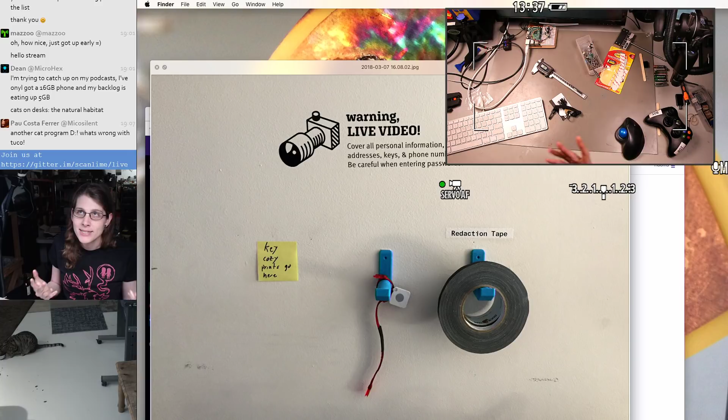And then in the past I've used stuff like OpenSCAD. I've actually done a bunch of stuff with OpenSCAD because it was the very first program I used to do CAD, not just CAD in general, but specifically for 3D printing. I had done a little bit of 3D modeling for animation before doing any 3D printing, but the very first thing I reached for when I got my first MakerBot way back, that MakerBot is actually the one that's still up on the shelf there.

Can I show you with the cat cam?

It needs a little bit of work, but it's still in mostly all right condition. I should do like a fixer-upper stream at some point. That sunflower Mac was never actually mine - a friend of mine found this on the sidewalk, and I took it in because it seemed like it was in good shape. And that monitor is destined to go elsewhere, it's just there temporarily. But yeah, that's my heavily modified MakerBot.

The first thing I used when I started on that machine was OpenSCAD, and I've done a bunch of stuff with that. But I think my standards at this point for stuff that I want to print and use around the shop on a daily basis - like I want things like fillets to be easy. I want to be able to do a good mix of visual design and more analytical design.

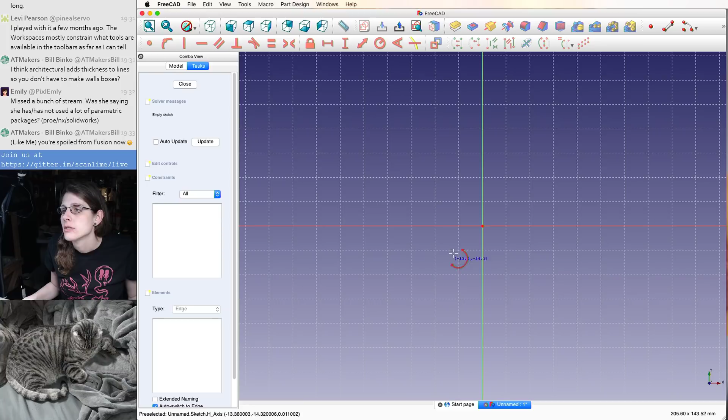Okay, so what am I doing here? Can I has circle? I can make lines, I can make arcs, center and endpoints. Is there a way to make a circle directly, or do I need to make an arc with the two ends constrained to each other?

It doesn't seem like I can do that, actually. There seems to be some ambiguity between a full-size arc and a zero-size arc right there. Let's look for something else. Oh geez, I can't delete this by pressing delete. Huh. I can drag it — how do I delete you? I don't want you anymore, bye.

What possible reason could there be for delete not deleting the thing? Oh, was I in some kind of mode? I pressed escape and something changed. Was I not done creating the arc yet? Was that the issue? Okay, now I can delete it. Oh, I think I just deleted the whole sketch.

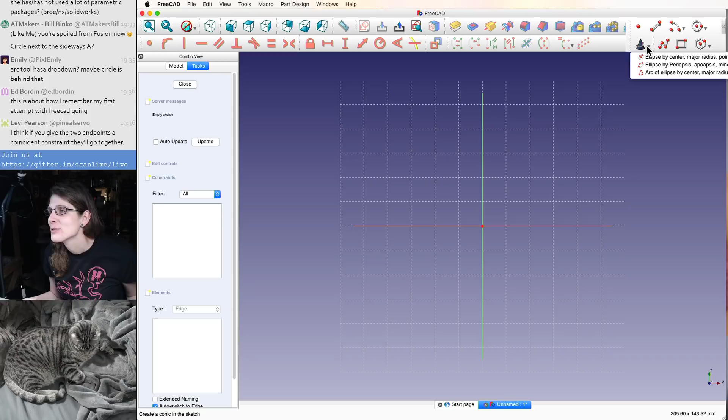Okay, deleted the arc. Do we have a circle primitive? How many expanders do I have to click? There's a wizard hat. Oh, is that? Oh, there it is. I just didn't see that before, or maybe it was slightly off screen. Center and rim point — I kind of wanted center and diameter, but that'll do.

So I'm still in the circle tool. Was there a... oh, its circle tool disappeared now. Is there a shortcut for this? How would I know if there was a shortcut for this?

I'm gonna assume there's no shortcut for anything. There's probably a shortcut buried in the wiki page, or like in some commented-out line in the source code or something.

This is zoom-related stuff. Where's different selection tools and all that?

So that's still... do I just have to press escape? Last time, no, that exits the sketch. And then going back into the sketch takes me into the start center for some reason. I have no idea which behavior is intentional and which isn't.

That's one of those things where if open source software had design documents or anything indicating intentionality with regard to user-facing design, you'd be able to answer that question — is it supposed to do this? Maybe, I don't know. You get that same problem in software that does have design documents. It's just that you can easily look at the document and route something toward it being a problem with the design or the implementation.

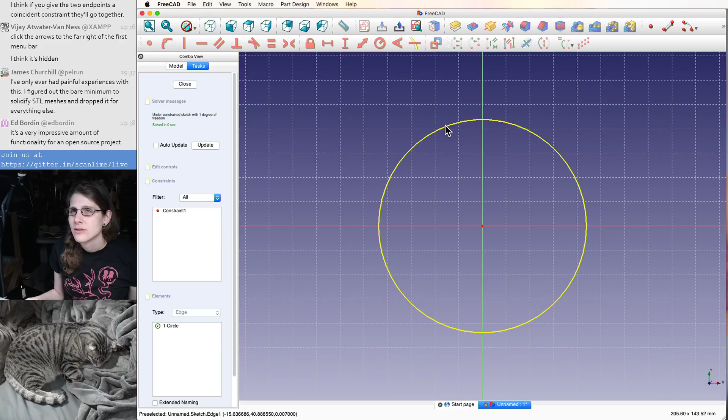I think I just have to set the radius. Okay. So that's what? I think I want like 4.25. That's my magnet.

Now, how much? I think I want to start by modeling basically a cylinder that's kind of the interior of this booth for the keychain. So,

Excuse me. Just getting a rough idea of how big I want this to be. Maybe 6 centimeters or so. The widest thing on here is this access card, and it's like standard card size, which is about 5 centimeters.

Let's see what 6 centimeters looks like. Let's go all the way over here and get a circle. Oh, there we go. I can encourage it to show up on the screen.

That wasn't actually constrained, was it? How can I tell if I'm making this constrained? So way down here it tells me H axis, V axis, root point. I think that's what I wanted.

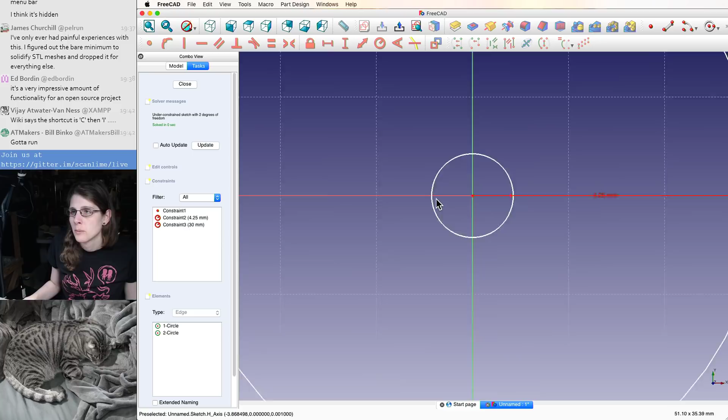Can I move this visually at all? Maybe not. Oh yes, I can. I just have to click it just right.

Oh, I'll be right back. Oh, so much sneezing.

Alright, how thick? Just like, what do I want this to be shaped like? 'Cause, I mean, I don't want it to be a fully enclosed circle. Can I offset?

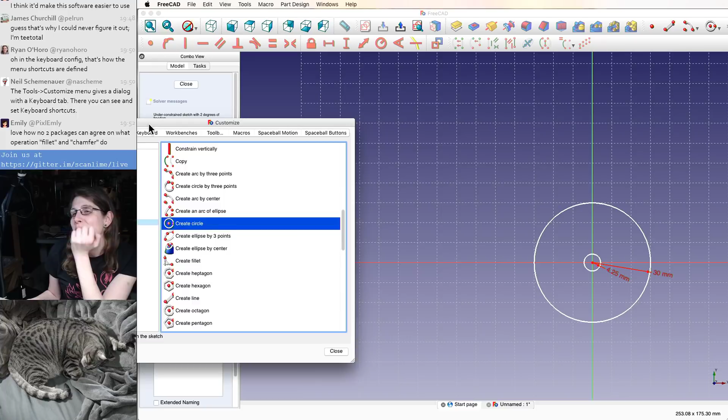Great, so if I want to create a circle, all I have to do is root around in this dialog box for ages. Now, what is this even for? Can I drag this to the menu or something? No, I can't drag it.

What is this UI for? There's a help button which just gives me a weird cursor. Oh gosh. This is like a UI blooper reel here. Oh gosh.

I can't drag it, it just scrolls the whole thing. I don't see what this is even for. I'm not even switching commands here, like that's just what was already highlighted. Is that the problem? Do I have to exit this first?

Why doesn't that have an icon now? See, I can't drag them, can't right click, can't do apparently anything with these objects. What are they even for?

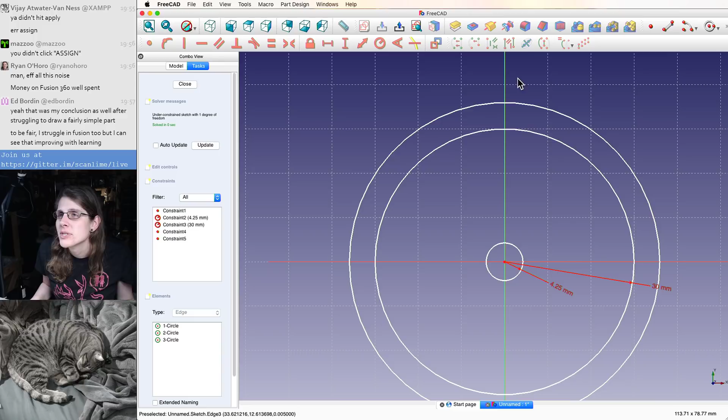So C was coincident? Alright, might as well use that keyboard for something. Where's that radius, though? Oh, there it was, Shift R. Alright, where's the wall?

So I want a flat surface I can put against the wall. And then I want to kind of blend that into this with some more circles. Let's just throw lines all over the place.

Making stuff tangent. Do I want that to be thicker on the back? I don't know, man. 2mm is probably thick enough for everyone, right? I'll add some internal fillets.

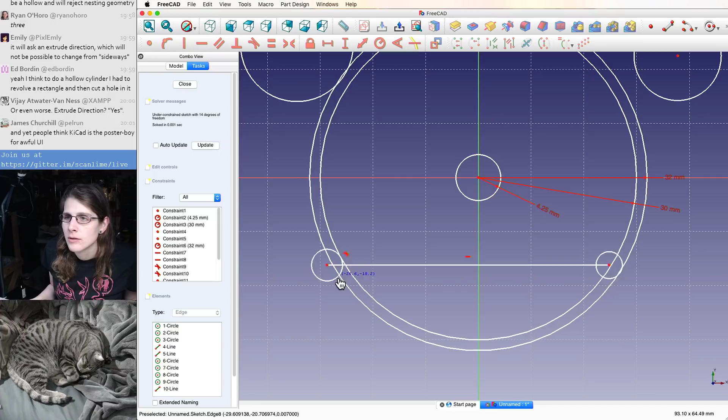Can I make 2 circles tangent without it exploding? I don't know. What? Okay, that's just the circle not being vectorized very accurately.

I should really save this. This could crash any second. Sure, let's...

Alright, so I can decide how far down that should be later, maybe based on how wide I want that opening to be or something. I'm gonna just go to town with a trimming tool and hope that doesn't break anything. It probably will.

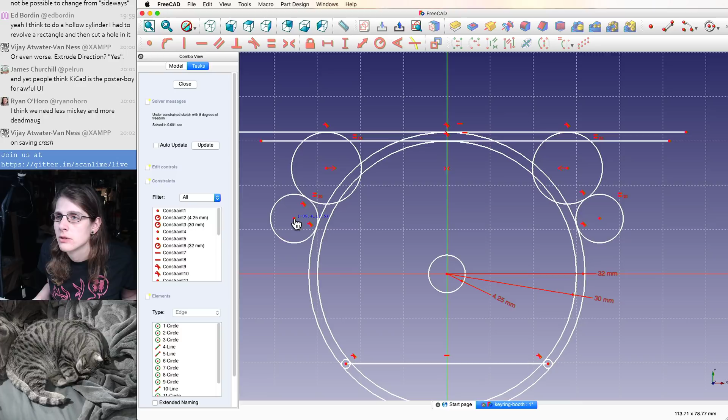Maybe I want to set some of these sizes first. This is entirely aesthetic, I'm just trying to figure out what I want the back of this to look like.

I mean, I could also try to make it have a sharp joint up against the wall, like that. Oh, that's kind of nice.

That is pretty close to being on this line. Maybe I'll just actually make that on the line, like that. Cool.

How would I make this distance fixed? Yeah. 40 millimeters? Nerp.

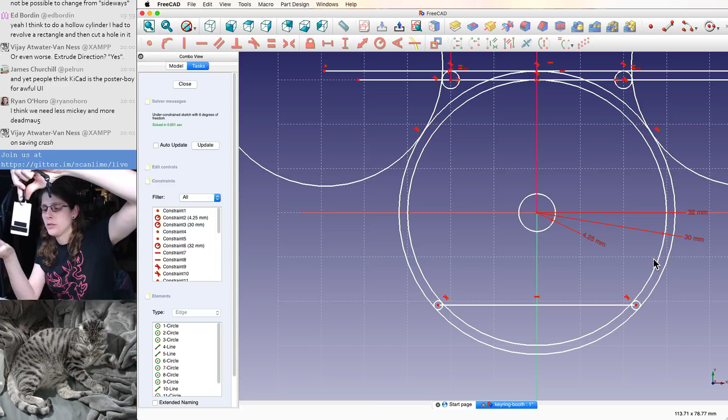Should figure out how much I actually need to cover up. Let's assume the sensitive information is... Oh, let's just make it 45 degrees. Did that work? No.

Oh yeah, this is much more deadmau5 than Mickey now, isn't it? That's great.

Manaware is asking if this is a thing you hang your key rings off of. Yeah, basically. We're looking at it top down right now. So this edge right here will be up against the wall, and this is where a magnet goes in. And then this is kind of like a privacy shroud that will keep cameras coming at it from a side angle from seeing what's going on inside. Most people don't have cameras peering over where people might be hanging up their keys, but my shop has that going on right now.

Well, that seems all right. I'm a little worried this isn't big enough, or maybe I just need to put this further back in there.

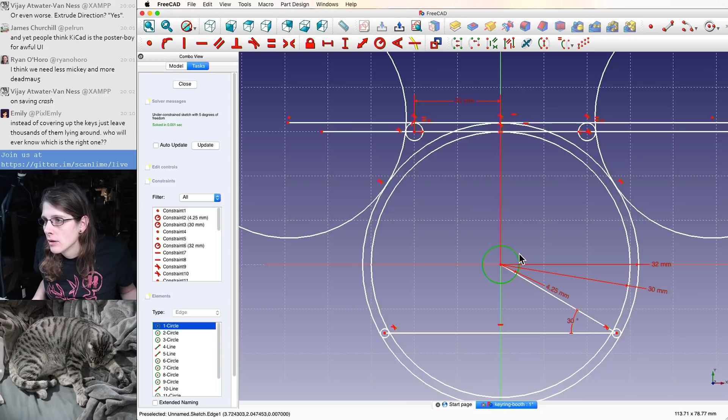I can't just move this, can I? I'll just delete this. I wanted to try putting it up here somewhere, maybe.

Degrees of freedom. If I click this, some of the icons change.

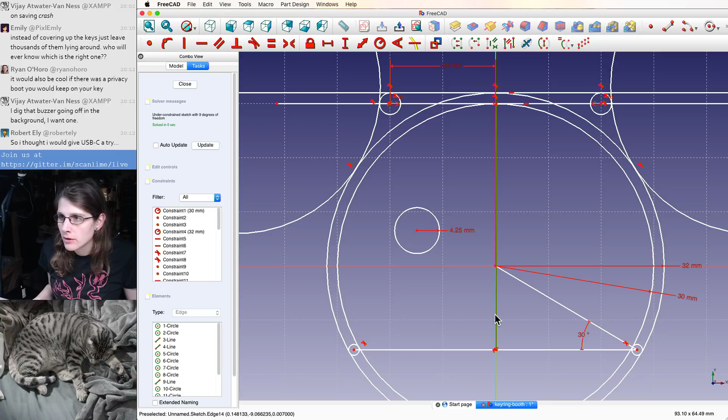So, like, how about instead of that line, actually? Let's delete that line. Instead, oh geez, this is gonna be all over the place. So I can make two lines. What is even going on up here?

What? It'd be cool if I actually got more resolution when I zoomed in. Like, are these touching or not? How do I know? I mean, I can put the constraints on that I want.

Does the space mouse work? Space mouse does not work in the 2D scenes, at least. I don't get anything from the space mouse.

Robert, which thing are you asking how to hand solder? The passive component or the connector?

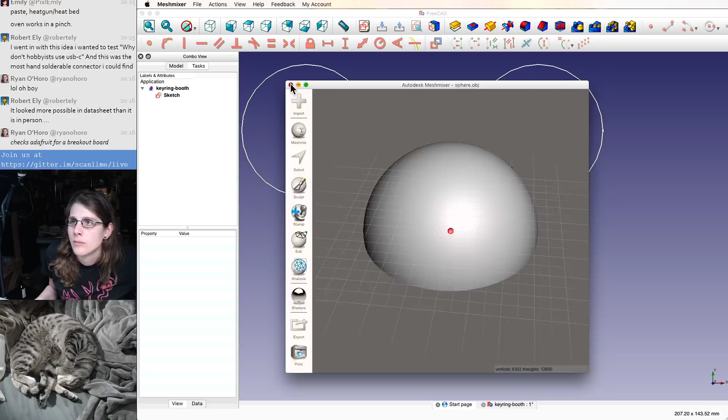I thought this was a pretty safe app to just try out Space Mouse support in. That would be useful if it works. Do we not have a browser either?

Let's just update this. Oh, the USB-C connector, yeah.

Yeah, I've not tried doing one of those myself, actually. I'm curious what people's experiences would be. I would expect you'd have to go in there with some gentle heat and patience, with a hot air tool and possibly also a preheating tool.

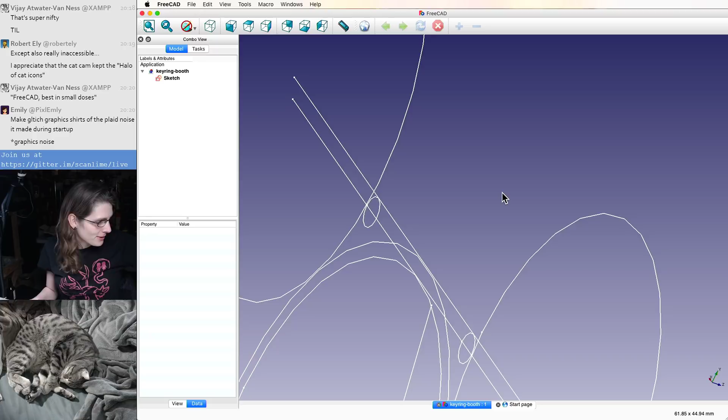Yeah! Whoa, where is my center of gravity? Okay, this is slightly different than I'm used to. The coordinates are rotated 90 degrees relative to how I'm used to the Space Mouse operating. That's not terrible.

And it does work in sketch mode, but it doesn't keep it orthogonal. The buttons don't work on my Space Mouse. That's fine, well, some of them do. The keyboard mapped buttons work, but there's a button that's supposed to zoom and a button that's supposed to rotate, and those don't seem to do anything.

Okay, I was just trying to put the magnet on, right? So I want these to be equal. Where are my constraints? Where did the constraint toolbar go?

Why am I having a new problem? That whole toolbar with all the stuff that I was using is now gone. Oh, I was still in the Start workbench somehow, instead of Sketcher, which is what I want.

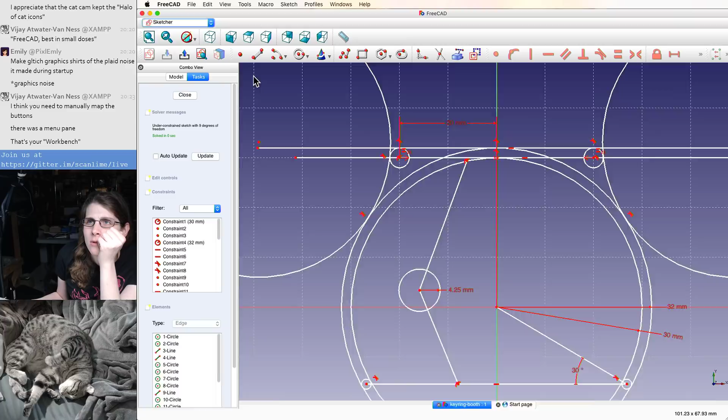See, like in Fusion 360, it has a modal interface like this, but they make the mode very obvious, and it's weird where in this view the mode isn't visible. I can turn on this, which gives you the mode, but now the mode takes up an entire line. Can I dock this maybe? Yeah, that's better, that's more like what I wanted. Why isn't that the default?

Why are these laid out different? Oh gosh. Oh, I hate these toolbars, these are so 90s. Somebody thought this was a good idea because you can just rearrange it and make it do anything you want, but it's the same reason I hate the toolbars in IDA 5.7, because I'm just always having to mess with them, and it messes with your muscle memory anytime stuff moves. If it was always possible to get them to stay in just the right spot, that would be great, but if there's ever a bug in the toolbar, it just messes with my ability to remember where things are.

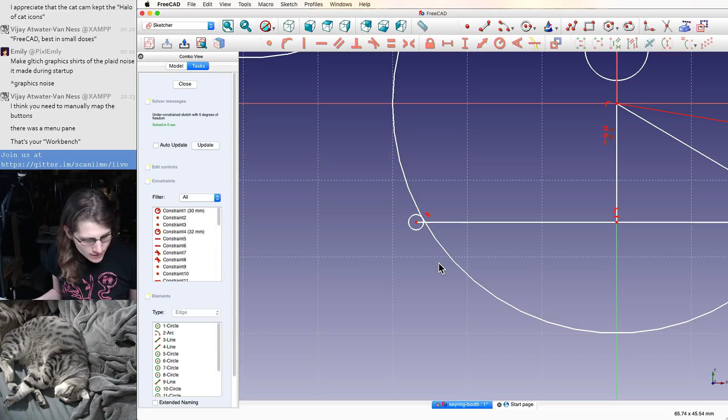Really? Really? Where does this work? Do I need to make those stick together more thoroughly somehow? I thought these were already constrained to be attached to each other.

Where are my remaining degrees of freedom here? It says I have 5 degrees of freedom. Maybe I have to make all of this stuff construction geometry and somehow select the pieces I want, but I need to split this, and I need to say right here at this intersection, I want this and that to be different parts of the curve. And I thought that it would automatically do that at the tangent points.

Come on, web browser. Where is my web browser?

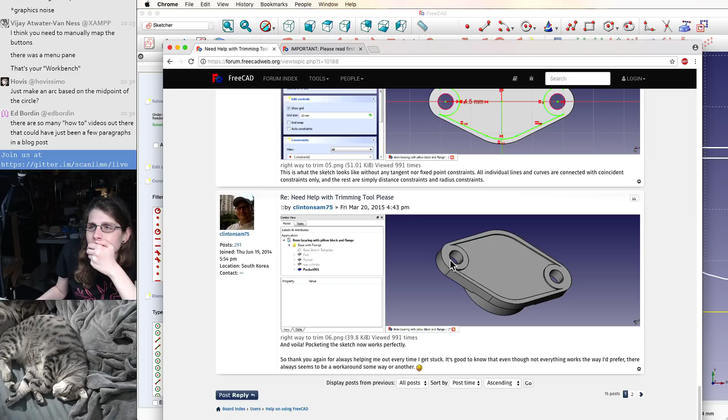Has this gotten any better since 2015, is my current question. So it seems like either we created the constraints in the wrong order, or the constraints aren't actually constraining it. Let's try to figure out why. We still have degrees of freedom in the document anyway.

What is free to move? This is free to move. I just want to make this pretty big. 50, sure. 4 degrees of freedom now.

Where are my degrees of freedom? It'd be cool if you could tell me. Is there any color coding? Am I just gonna have to drag stuff? Oh, these lines, they can slide.

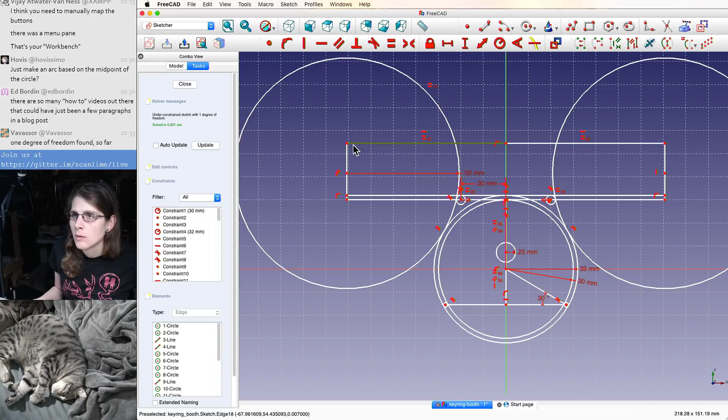That. Fully constrained. Turns green to let me know that I've earned a cookie.

I don't know why trim wouldn't work at this point. Let's see if we can make trim do something different. Oh, interesting.

Still no. Oh, it highlighted the whole thing, but when I actually clicked it, it did the right thing. Let's see if we can keep that up. No.

I really don't like this. That didn't even trim at the right place. Look at that, look at that. It's supposed to be tangent right there. I could drive an entire truck through that gap.

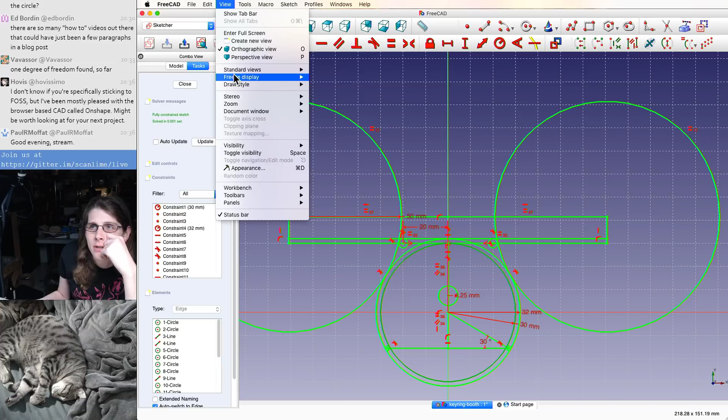Visibility. How frustrated do I have to get before switching tools? I wanted to try to do something entirely with FreeCAD. But it just seems less like I'm having specific problems and more just that there isn't that much here, or that I'm having trouble finding what is there. I mean, it's cool having all these different spaces, but the sketcher at least seems like it's kind of sparse.

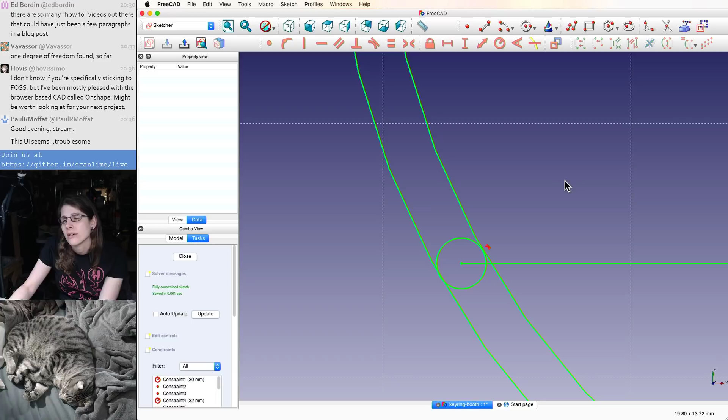And Onshape, I don't know, I should try it just to see what people like about it. I just haven't heard a lot of specific things that people like about it, and it mostly just seems to be because it's a browser-based thing. And I don't really like browser-based things that much. They're okay, but I wouldn't use it because it's a browser-based thing, and it seems like that's a slight negative to me.

What if I take off all the constraints and redo them? Save this. Let's leave the size constraints. I'm going to take off pretty much everything else. Maybe I should keep the horizontal and vertical constraints. I don't know.

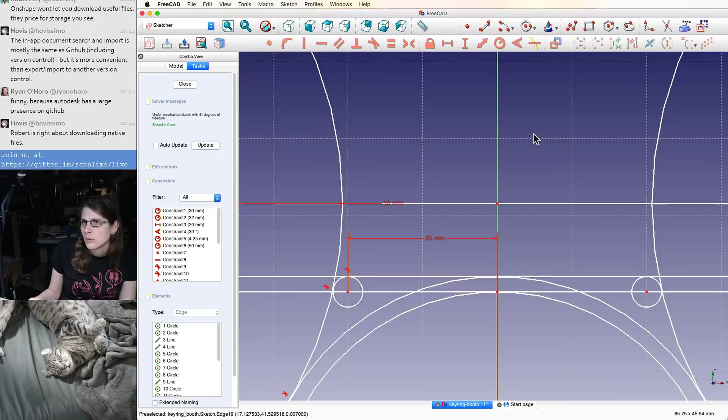What can I even move? What do I actually do to figure out what needs constraints? I saw tools to select over-constrained areas, but not under-constrained areas.

Oh, Took's looking great on the couch there. He's having a good time.

Oh, where was the trim tool again? T-R. Was that a crash? I think that was a crash.

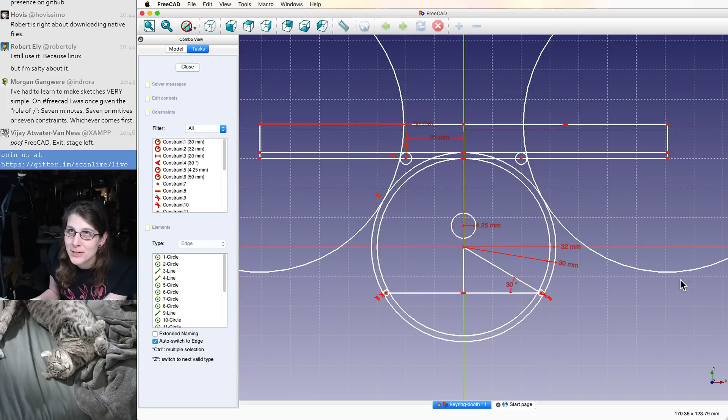Is that reproducible? This is what you say after shooting yourself in the foot, right? You just pull the trigger again. No, it isn't - now it trimmed way up there. Am I just gonna have to make my own tangent points? Or make my own trim points?

Can I attach something else to the intersection and use that for my trim point?

I don't like this program. I'm sorry.

We could go back to OpenSCAD. There's a whole OpenSCAD workspace in here. What is that like?

It can shell out to OpenSCAD and put a copy of the results in here. Cool. Cool story.

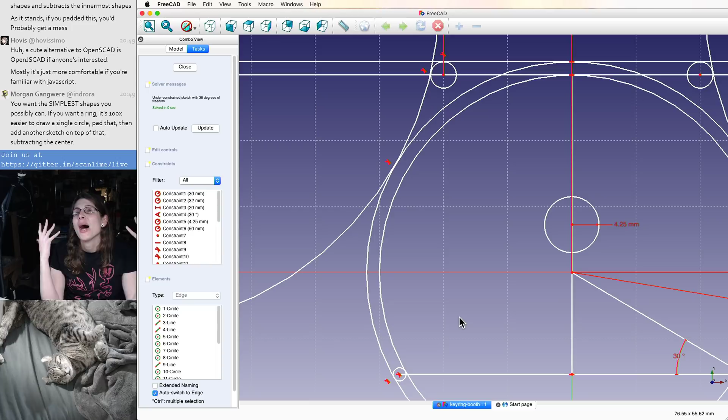If I can't extrude any of these shapes successfully, I don't... this is about the point where I would love to actually ask a FreeCAD developer, how do you get from here to a working model?

This is really close to what I want. Can I use all these pieces as guides and then just do the unions and everything else I want in 3D instead of 2D? That doesn't seem more likely to succeed, does it?

Okay, so I'm outside the sketch right now. What can I do with this? And how can I see anything?

What workspace am I in? I'm still in the start workspace, which I had to open up to see. Drawing, part design.

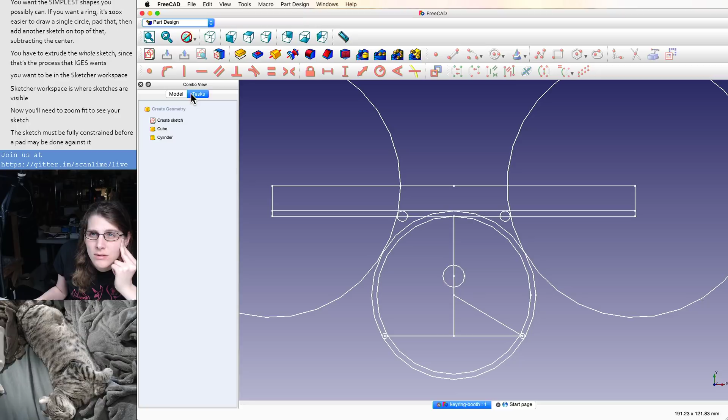Okay, so pad - this is, I think, what Morgan was talking about with making the extrude, and it's probably going to break if I do it to the whole sketch. So can I make new sketches that correspond to the pieces I want to keep out of this design?

I think so. Can I copy a piece from that? Can I reference? I think all I've got are the axes right here. Can I project a piece from a different sketch on here? Can I just make a bunch of copies of the sketch and delete the parts that I don't want?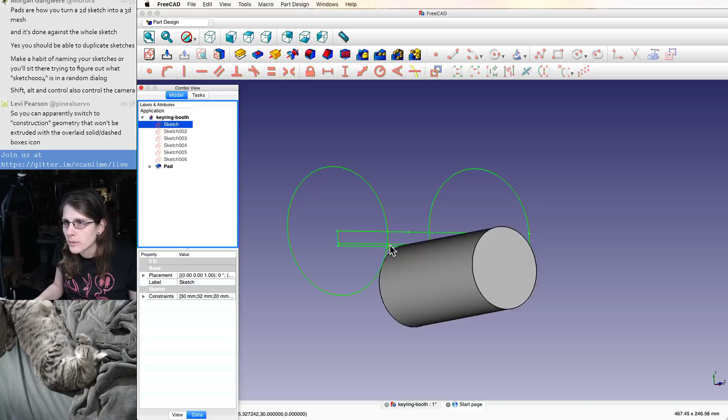How tall do I want this to be? There's no way that doing the rest of this is actually going to work, right? Like, I need to...

Morgan's asking if my sketches are constrained to the 2D origin. Maybe. Why does it matter?

Like, the problem I was having was just that it didn't seem like trimming actually worked. It just didn't seem like it knew that objects that are tangent actually touch. At this point, I just feel like this is an exercise in futility.

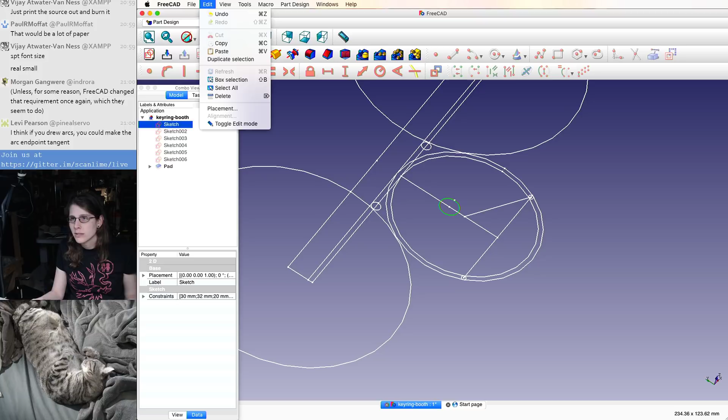What can this program do? Are there examples of objects that people have made with FreeCAD, and how do they even work? Do they use the trim tool? FreeCAD success stories.

What is all this stuff? I can't believe I clicked on a LinkedIn page.

So you built this with FreeCAD? That's cool. Where are pictures of the CAD part of it? I don't know.

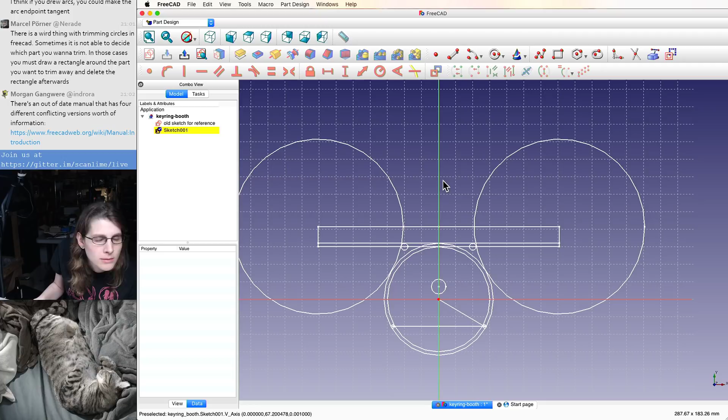Oh, see, that time it was just like a 3/4 second delay between pressing the middle mouse button and actually going into pan mode.

Okay. Arcs. So I'm actually selecting the origin, right? Root point, yeah.

It took like a second to switch into panning mode that time. What the heck?

Alright, and I'm just gonna put this vaguely over here without a real constraint yet. And then this goes all the way around. I'm just gonna have to do this without trimming or anything.

So can I make these tangent?

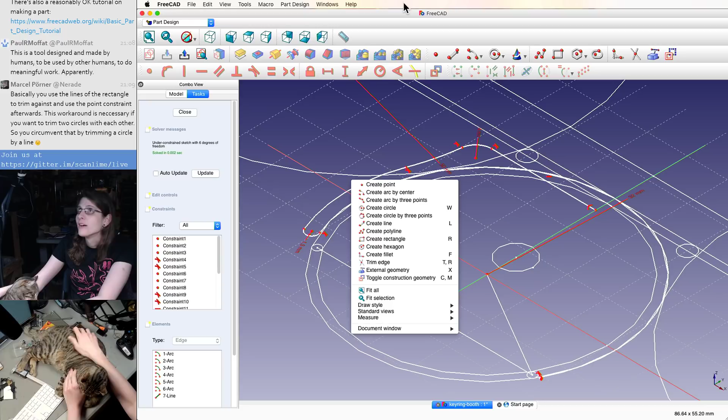Wake up, controller. Tuco, you're helping out. Oh, he is so purring now. Tuco is good at getting my attention. Yeah, good boy.

Can I have this back? You gonna lay on that raspberry again, honey? Don't eat it. Oh. Hey, honey.

Oh, can we set this distance?

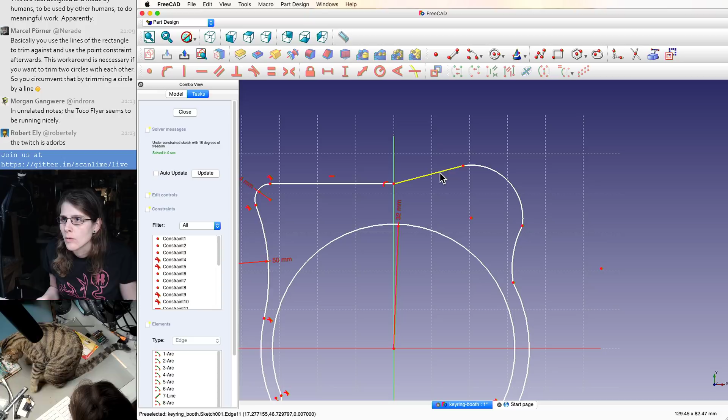It's getting there. Just needs to be a little less asymmetric. Maybe even completely symmetric if we're feeling brazen.

That's what I wanted. So now I can adjust that width and this height. Yay.

Can make it have such a wide presence on the wall. How wide is my adhesive strip? Adhesive strips are 20 millimeters-ish. Actually, like 18 millimeters, so they're probably sized to fit on something that's about 20.

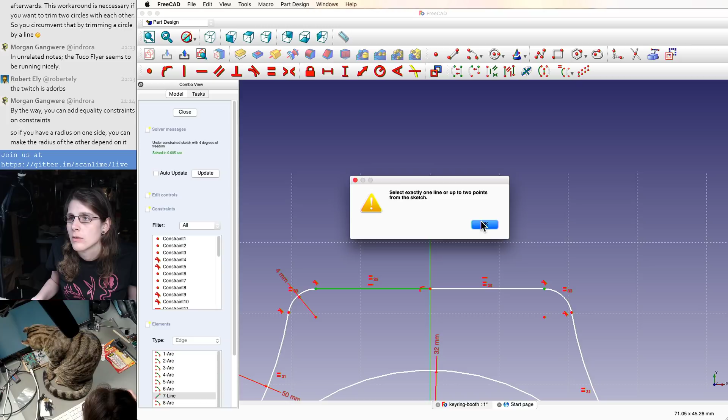That's pretty little. Not terrible though. That just, I don't like the aesthetics of that.

Whoa, 45. Oh, let's fix that.

Yeah, that's better. That's like enough where I could use 2 strips if I wanted to, but I don't have to.

And then I'm still looking for a way to set this distance. I still don't have like a midpoint. I can make a line that is tangent and horizontal.

Oh, can't I just, like, I know this is already centered. Can't I just use a vertical constraint? That should be enough, right? I don't want it to try to extrude geometry based on this line, though.

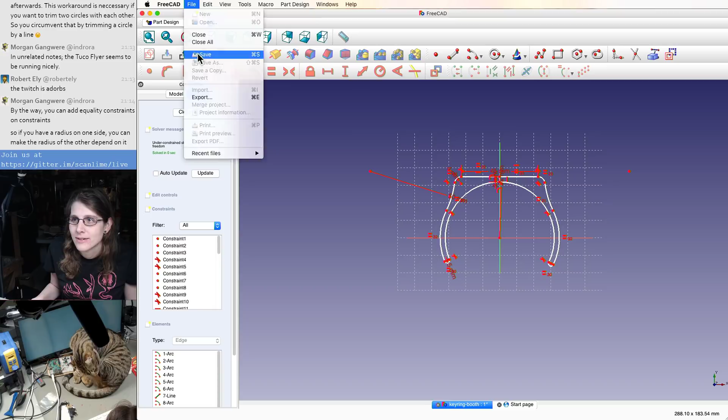If I delete the line, it deletes the constraint. Let's try keeping that there. I don't know, man, this doesn't seem likely to work, does it? Is this the simplest sketch I can get away with?

Whoa, what am I doing? First and second length? I'm not used to how this is 90 degrees off from all the other Space Mouse apps.

Let's try deleting this. That worked, I guess. And how tall did I want that to be?

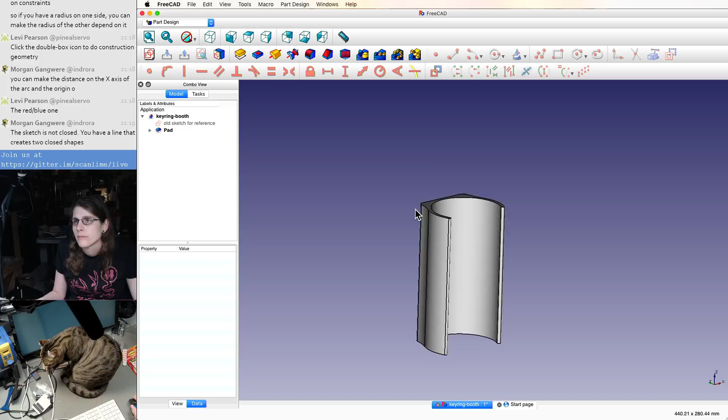Ah, that was exhausting. And that looks okay, but what if I wanted to fillet these edges, for example?

I don't know, let's try to keep this really simple. This is almost viable, I just need to add the top to it. Let's just try to keep this simple.

There's the old sketch. Oh, neat. F2 is still rename.

Oh, this is one of those Apple keyboards that tries to have brightness keys. No thanks. Oh, they were already set like that. Why wasn't it working then? I was pressing F2. Alright.

Let's call that the shroud.

So I think I just need to make another sketch based on this. Yeah. Cool, I'm starting to get the hang of this. It's still kind of frustrating, but it's getting a little better.

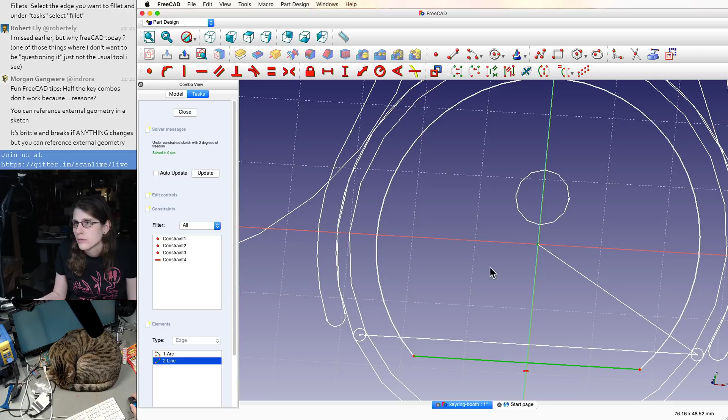Which pixel do I have to click to get the origin? Alright.

Yeah, that's all right.

Wait, what was... Oh, yeah, no, that would have been fine for the old size, but that's right. I changed the size for that.

Let's actually just delete this old sketch. It's no longer helping. I mean, except for maybe the magnet hole, but I'll figure that out again.

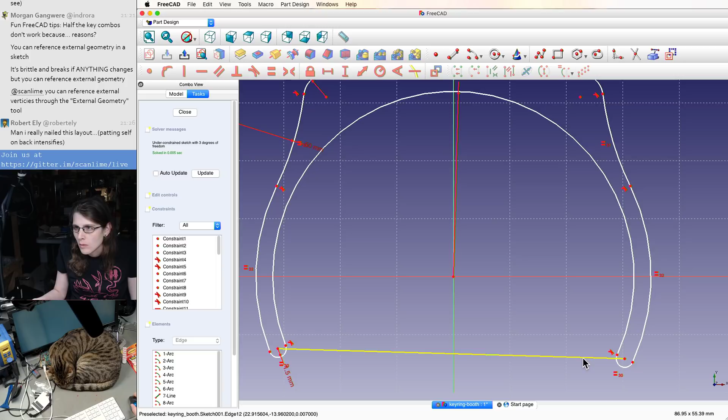Okay, right, I never actually set that angle. And I don't think I can do that with constraints.

Like, can I have a line that is not included in that pad that I just made? Yeah, I think that just failed to create the pad. I want something equivalent to construction geometry in Fusion 360.

If I delete that, this works, but now it's under constrained.

I'm not even going to use constraints for this. I'm just going to put it where I want.

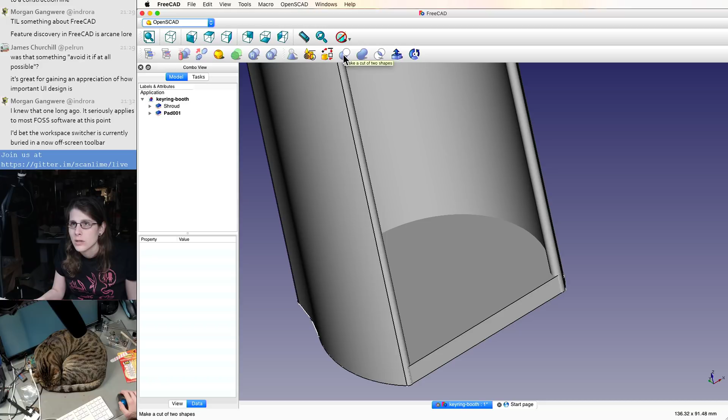Make it cut. Okay, that's not what I wanted, but that is the right kind of operation. Boolean. Okay, we made a Boolean. I don't know if this is real until I actually see the triangles, though. So let's see if we can export this shape, because I am a little skeptical here. Like, what did it do with these faces?

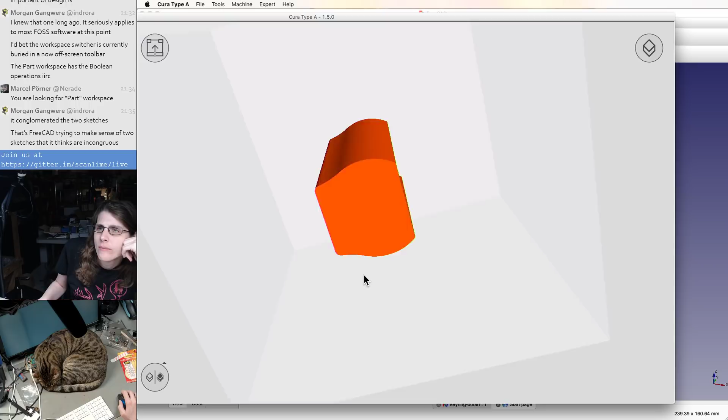Where's the X-ray view? Looks alright so far.

I don't want a raft.

Yeah, I mean, I don't know how good the triangles are, but it looks like it's good enough for the slicer at least. How bad are the triangles though? Like, let's just look at this in wireframe. Oh, maybe that's fine.

Yeah, so it still actually got the edges from both sketches, but it does look like it reconciled them into a flat plane, which is fine. Okay. Yeah, I'm fine with that.

Let's try cutting a hole for the magnet and then do any other odds and ends we want, and then just finish this, because I'm so ready to be done with this. I'm not going to give this any nice little design flourishes. It's going to be very bare bones, which is unfortunate, because I would usually want to design things a little better. Like, I don't like these sharp corners down here. You're just going to poke your hand on those. There's no fillet tool that'll actually deal with those, is there?

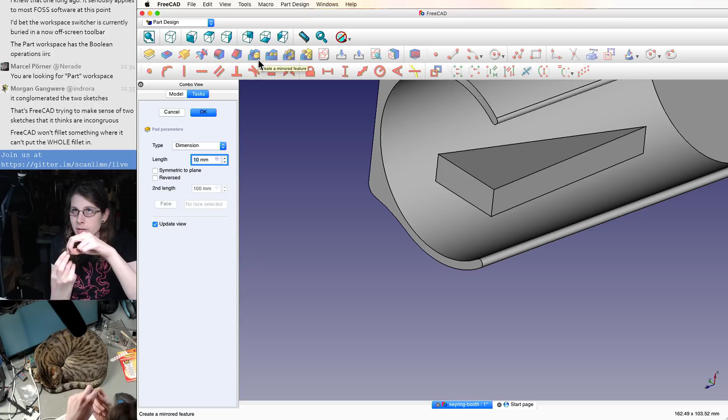Huh. That's weird. So pad is like, it's this weird terminology. Like there is an extrude. Extrude just seems to stretch, like just adding one dimension, but then pad is like that, adding a dimension and then capping off the edges. Rhino treats them both as extrude operations, but there's like a boolean you can pass in for whether or not you want the edges.

Why are the Boolean operations in the OpenSCAD panel?

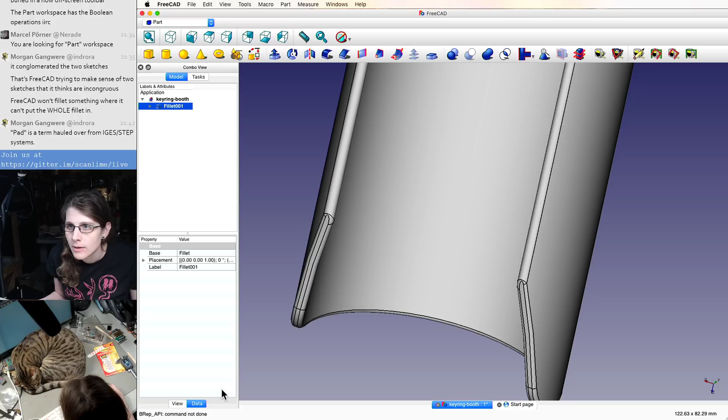Huh. Oh, it was trying to fillet that whole thing. That's interesting. That's kind of nice, actually. Let's see if we can get away with 1.5 millimeters of that.

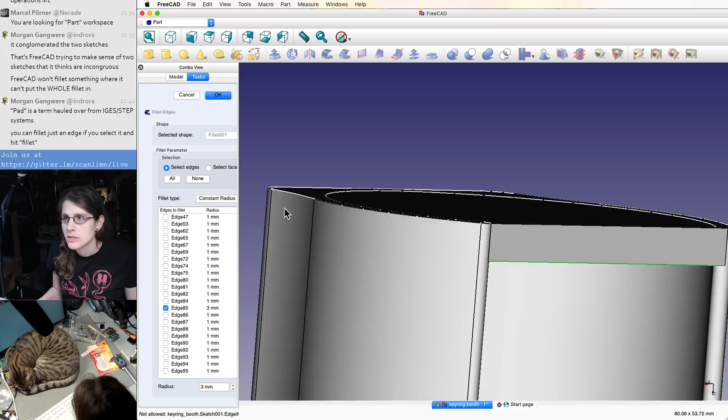Let's also add these. Yeah, those can be smaller. 1 millimeter is fine. Oh, it's selecting the right pieces at least.

This is working surprisingly well so far. I'm gonna jinx it, aren't I? Oh yeah, now I can't tell what I've selected. Huh.

I don't think I'm going to try to fillet those, I think that's going to break it. That's also my build surface, so I'm going to have a brim there, and I can just give it a slight chamfer with the deburring tool after I print it.

But that edge I did want filleted. Alright, I think this just needs the magnet, and I can finally be done with this monstrosity.

I might use this program again. It's not that bad, it just is really annoying at first.

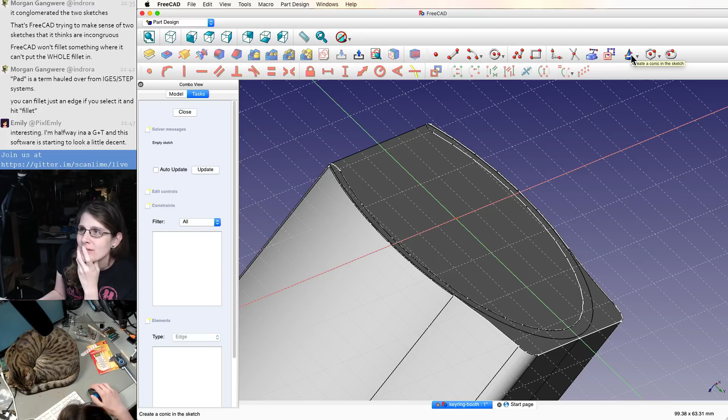I'm just gonna have to define this manually, probably. Oh, great. Why is the origin so hard to pick?

I can see what I'm picking based on what's in the status bar, and it's either the horizontal or the vertical axis, but getting the origin is not happening. Do I have to turn this other stuff off?

Why can I still see that? Oh, there's like 1 pixel that's the root point. Come on.

Do the FreeCAD developers watch people use this software ever? There are probably FreeCAD developers watching me right now and just, they're probably not happy with me. I'm sorry, I'm trying.

Just tell me which pixel I have to click on. Whoa. If I zoom in far enough, the origin isn't actually at the intersection of the horizontal and the vertical axes.

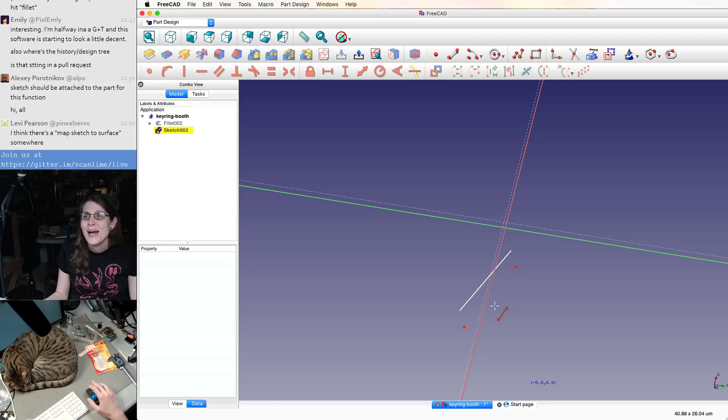This is... I've lost the ability to can't even. Okay, if I exit sketch mode accidentally, then they draw correctly.

Oh no, I'm back in sketch mode, but I lost my geometry. Okay, it's just way down here. Okay, now it seems fine.

Was it in like ultra low precision mode somehow? Because now that's actually at the origin, even if I zoom in somewhat.

Was my camera slightly rotated? I thought I reset my camera.

I really get frustrated how I have to seemingly wait after I press the middle mouse button before moving, before I can pan. I don't know if that's actually what's going on, but it just feels like... okay.

This seems to be working. What was going wrong? It seemed like it was doing something where...

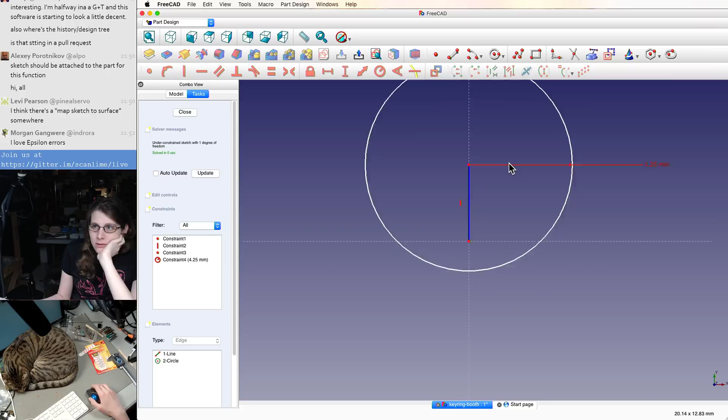Okay. I'm gonna assume that's right. Yeah, it seems fine.

Okay, so I need to make a magnet out of this now. This will be how thick now? Tuco, you're not sitting on a magnet, are you?

It's okay if Tuco sits on the magnet, I just don't want him eating these because that would be really bad. Okay, 2.8, let's call it.

Okay, so now I need to subtract these two. I don't know why I have to switch to the OpenSCAD workspace to get cut. That's weird. It makes me wonder if they are using the OpenSCAD code to do the unions and booleans and all that, or if they're probably not shelling out to OpenSCAD. It seems more integrated than that, but I don't know. They seem to want to shell out to OpenSCAD for OpenSCAD stuff.

Okay, this is almost done. So it's got the shroud, it's got the place to wall mount, it's got a place for the magnet. Now it just needs a place for the actual keyring to sit up against the magnet.

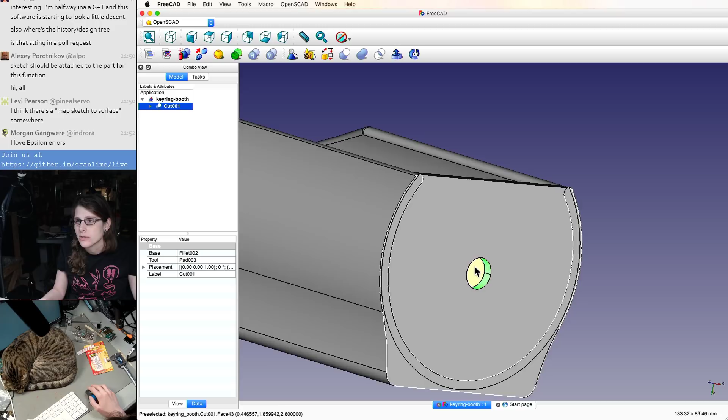What can I make a sketch on? It seemed like I could just make it on one of the basic planes, like the XY, XZ, YZ plane, plus an offset. I could do that if I could measure the offset distance, which I guess I could off the sketch I just made.

Oh gosh, I should name some of these things. Magnet.

It's interesting how instead of a timeline like Fusion 360, this seems to be just a hierarchy. This hierarchy seems to be both the structure of your model and the timeline of how it was assembled, sort of. Which is interesting. Kind of simplifies it, maybe.

So it would be great if I could take this point and just make a sketch at that point. Instead, I think I've got to measure this line and then just use that as an offset, which is not great.

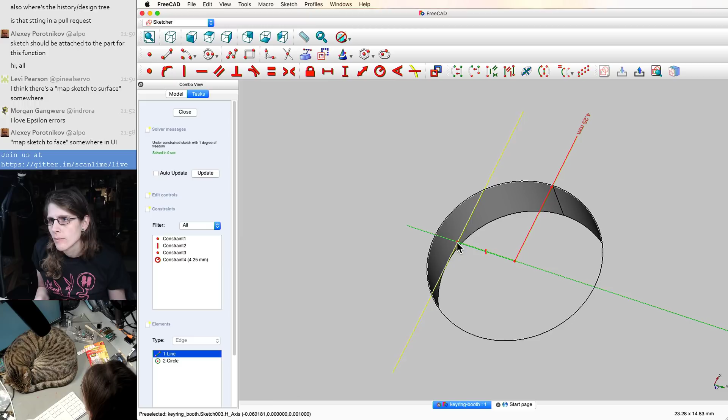How do I measure this? Not even in the right workspace. How do I click on this pixel? I want the center of the circle. Oh gosh, now they're all coming apart again. This couldn't be a camera thing. This has got to be a floating point error thing. That one's moving also.

I just want to, okay, I can select kind of. Why is this program so hard to use? That is 100% a rhetorical question. I feel like hard to use, I mean that very literally. It's not complicated, it's not advanced, it's just hard to use. It's just stuff that shouldn't be hard is hard. I thought I just selected 2 points. Come on.

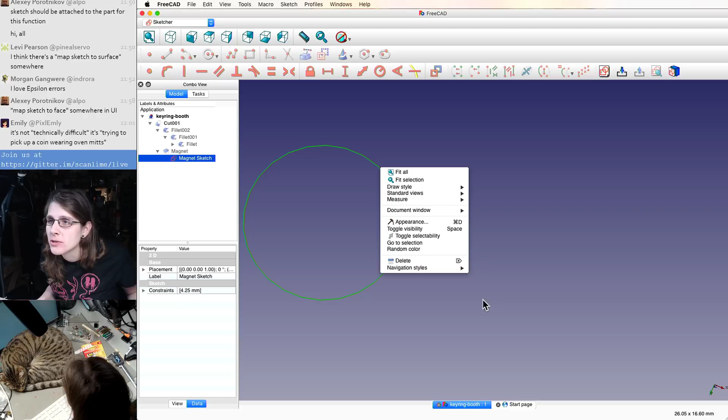Oh, there we go, measured distance. And I guess I have to be in sketch mode for that. I don't know, are those actually the points? I think they are. Oh gosh, what was that? Oh, I think that's a constraint. It looks just like a line. Okay.

Okay, so 3.06 millimeters is good enough for that. Oh, the distance becomes an object in here too. That could be useful. And I've got some coordinates. That is also useful. Let's keep track of that.

Can I make a sketch now? So you can see XZ, this is the XZ plane. I think I want XZ with an offset of 3.0595. This appearing over here makes me optimistic that I could reference this as a variable somehow. If this were a much nicer UI, I could maybe even drag this distance into this box and set up a link, but I don't think that's happening. So did that do what I want? Yeah, so I think I've got a sketch that goes through this magnet hole now. It's completely manual, but whatever.

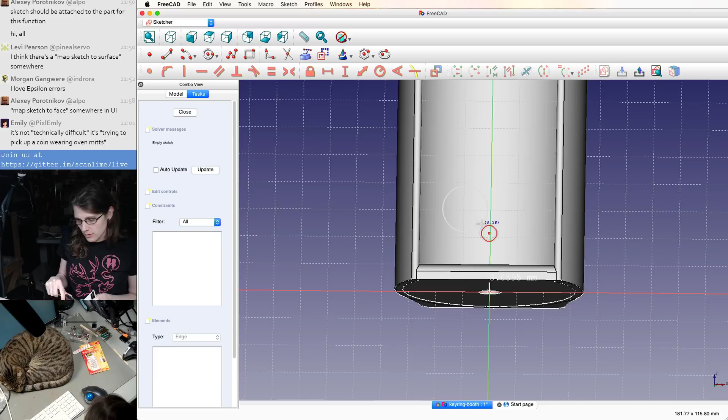Alright, keyring. How big is a keyring usually? My keyring is about 30 millimeters, a little less. Oh, it's also magnetized at this point. Let's assume it's like 31 millimeters maybe.

Oh, that's radius. Can you do math in here? Oh, you can, what a pleasant surprise. Oh, can I put that on there? Yeah, okay.

Now I want this tangent to the edge of the magnet, which I don't think I have. How am I actually going to get that? Okay, somebody was saying in chat that the sketch had to be part of the part for me to reference other geometry. So what if I put this in there? So it's already inside this. I don't think it can be in there. I don't know about that.

I don't know how to do this correctly. I feel like I'm just gonna have to eyeball it and it's gonna be subtly incorrect. I was trying to see if I could use this tool, the external geometry, but it seems like it doesn't want any of that. I don't know what to do with that.

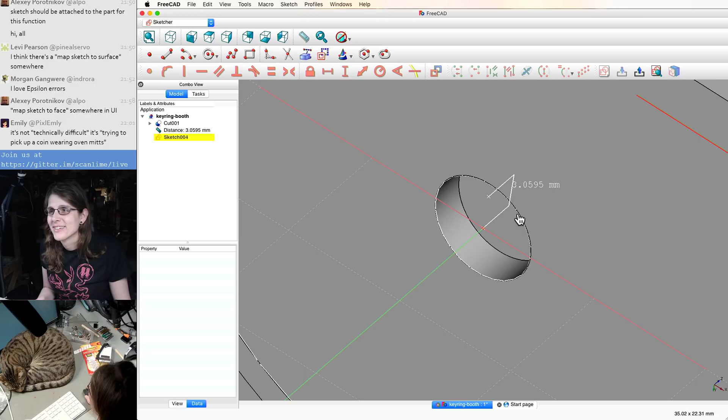I can use the Z buffer. Ugh, I feel dirty.

Although, actually, if I'm going to make this the outline for the cut and not necessarily the outline of the actual keyring, then I want it a little bit down, just to have some clearance, so that's probably fine. I want it to be inside, yeah like that. I don't really care by how much, not very much, but a non-zero amount.

And then I think I just want to pad this exact shape, symmetric. Is this the distance from either side to the center or from one side? It looks like the actual thickness. Cool, what actual thickness do I want?

This needs to be thick enough for the keyring for sure, but not so thick that the magnet falls all the way through, so it's a bit critical. My specific keyring is 3.8 millimeters, but if I want to make it a little wider, the magnet is 8, so definitely less than 8. But 5, between 5 and 6 seems good, maybe 5.5. Even 5 is pretty generous. Let's see what 5 looks like.

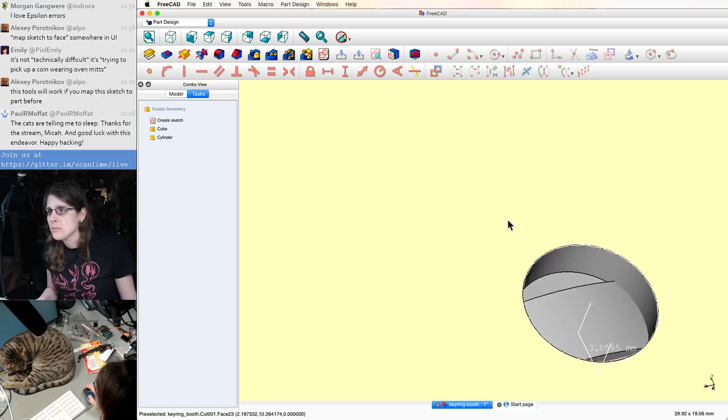And that's the top, so the magnet would be glued into this hole. These little shelves would hold it into place. As it prints, these shelves are going to be overhangs, and that seems fine. I think my printer can handle like a 7mm overhang.

So now let's do a cut. I don't know what it's going to do to have that distance selected. Oh gosh, this is so close. So now I maybe want a little fillet on here to help the key click into place a little bit nicer. But we're really close to done.

Oh yeah, the printer, it was printing something. It's probably done by now. I was making a AAA battery holder, so we can get this print started as soon as we're done modeling it.

I can hear Tuco snoring. I really, really like cats, if it isn't obvious.

Where was fillet again? Part. Oh gosh, which—I don't know why this would not let you select in the 3D view, or why it wouldn't by default indicate which ones are top level versus not top level.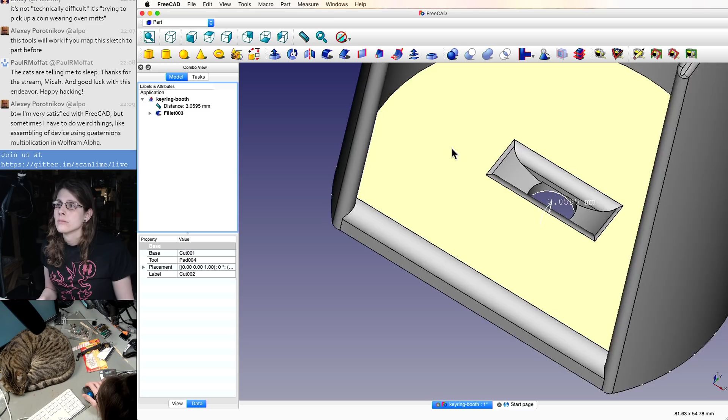The top doesn't really need to be that thick. It's there mostly to keep the whole structure together and to support—thinking about the load here, like you're pulling your keys out of this, pulling down on the magnet, and that's supported by this whole structure kind of cantilevering against the back and all that. This should have some thickness to it, but this is a little overbuilt at the moment, so I can print this with pretty sparse infill.

Let's edit that fillet a little more. I think that'll do. I think that's about done.

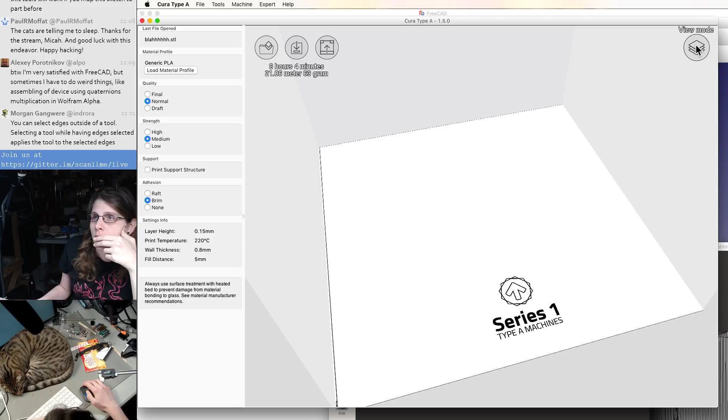Oh, that was the wrong file. Anyway.

So, generic PLA, normal.

Probably going to print this in like a white or gray PLA to match the wall. I've got some nice neutral colors like that, or shades.

So right there it starts building out, and then yeah, right there it starts bridging. That seems fine.

Can I go to a 0.2 layer? This printer is not very good at coarse layers, but I think at least 0.2 and maybe 0.25 it does all right. I think 0.2 ought to be fine.

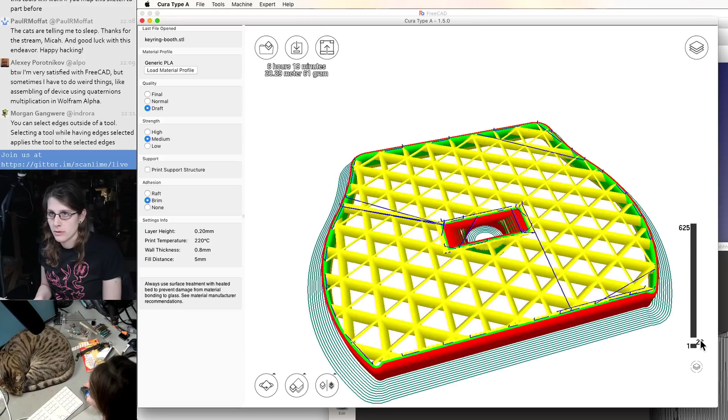We do have a brim. Am I logged into the printer? Why am I not logged into the printer? I guess I need to log into the printer.

Yeah, I mean, I'm glad I'm spending some time getting more used to FreeCAD. It's good to know both how to use it and specifically what it's okay at and what it's really not okay at.

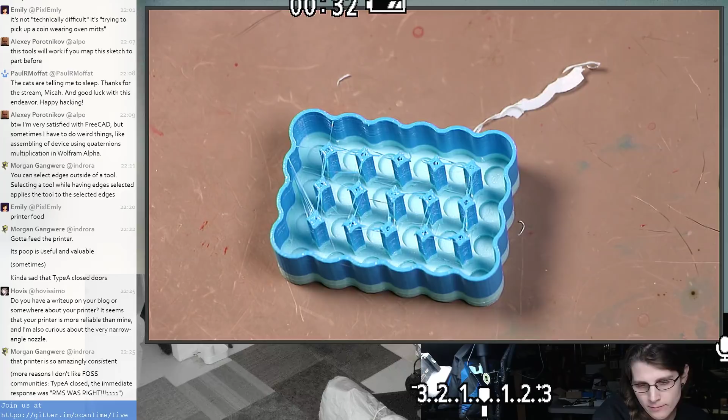Oh, the small strings go away pretty much instantly. Oh, and there's my first warpage. Yeah, those pillars are getting all wobbly and soft. This is pretty much worst case because I've got some relatively robust strings and some pretty delicate plastic parts, and it's in an enclosed space that'll trap all that heat.

But that's not too bad. I'll probably use this technique on other models, I'll just have to be really careful. And that's not perfect, but it seems like it helped. I'll let that cool before I do anything else to it, because it definitely looks like it warped slightly in that process.

Oh yeah, and the blues - these are both MatterHackers filaments. I've got a bunch of their colors and they've been really nice. I used a lot of these same ones, in fact these same two blues on the winch bots. This was actually me just trying to use up some almost empty spools, so I was picking colors I was lowest on. That's partly the reason for the filament swap. But then it also looks nice. So if you can find a couple of coordinated colors that you're almost out of, you can build some battery holders like this.